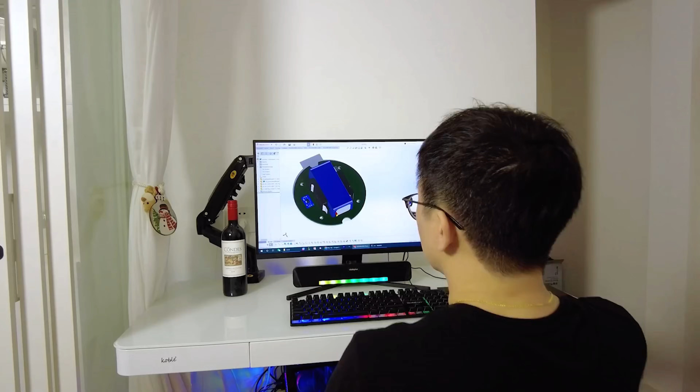You've probably heard me say this in my other videos, but I can't stress it enough. Designing parts that can be manufactured and assembled is one of the most valuable skills to possess as a mechanical engineer. It's what separates a good mechanical engineer from a great one.

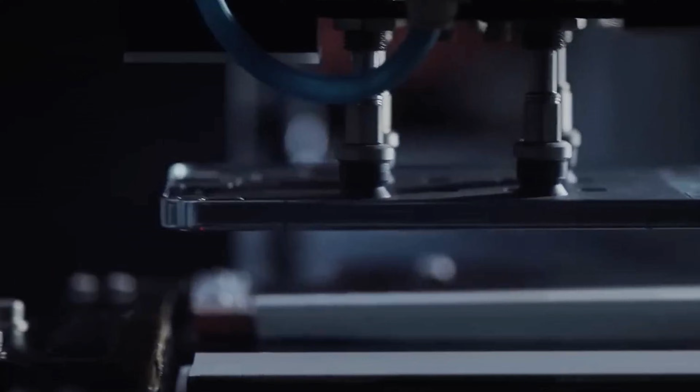Here's why. Companies are desperate for engineers who can design manufacturable parts with cost efficiency in mind. It's simple, money talks. Let me give you a real-world example. Bob, a junior engineer, designs a CNC machine part that costs $1 per unit to manufacture. No big deal, right? But what if a smartphone company needs 100 million of them a year? That's $100 million spent annually just on one part.

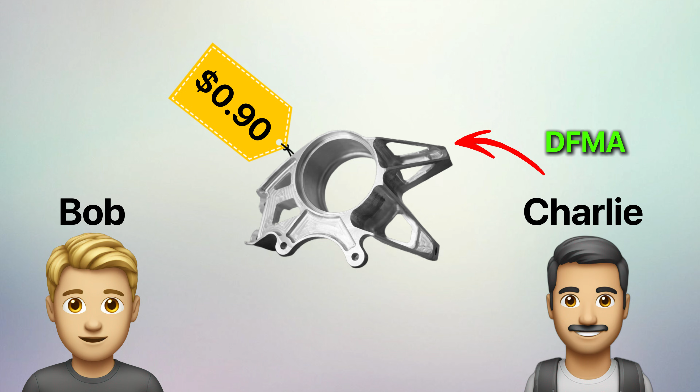Then along comes Charlie, a senior engineer. He redesigns the part with DFMA, or design for manufacturing and assembly principles, in mind, and brings the cost down to 90 cents. Charlie just saved the company $10 million on a single component. Now multiply that by the hundreds of parts in a smartphone. Imagine the massive savings across the entire operation. That's the kind of impact a mechanical engineer with solid DFMA skills can have.

But here's the kicker. Despite the importance of DFMA, many mechanical engineers I've worked with, some from even the top institutions and companies, don't get it. Why? Well, for one, there are literally hundreds of manufacturing processes, each with their own set of design guidelines and rules. It can be very overwhelming and virtually impossible to learn on your own without practical experience.

The truth is, 95% of mechanical engineers design parts on their computers without ever stepping foot into a CNC shop or seeing a plastic injection molding machine in action. With the globalization of sourcing and supply chains, you might be designing parts in San Francisco, while these parts are being made and assembled 8,000 kilometers away in Shenzhen, China. So if you've never seen the actual machines or truly understand the process steps and parameters instrumental in bringing your designs to life, how can you expect to optimize them?

So in today's video, I'm going to talk about a dozen or so manufacturing processes that every mechanical engineer should know, and a systematic way of learning how to design parts for each of these processes.

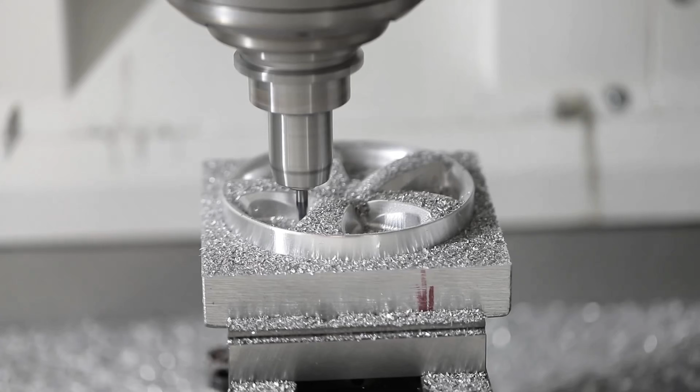The first type of foundational manufacturing process is CNC machining. It's a subtractive manufacturing process where material is removed from typically metals and plastics to arrive at the intended shape. Three key machining processes are milling, turning, and drilling.

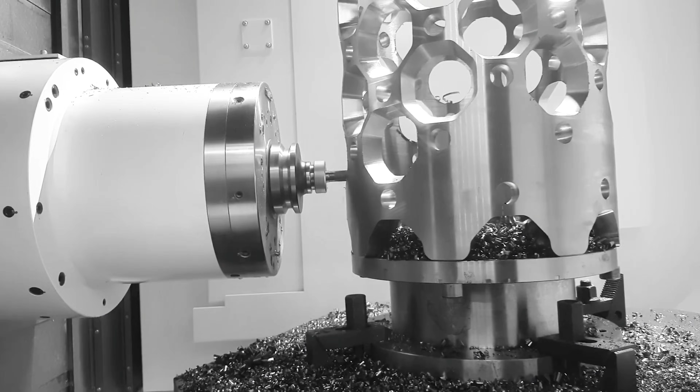Milling involves removing material from a workpiece using a rotating cutting tool called a mill or milling cutter. It can create complex shapes, contours, and holes by moving the cutter across the workpiece in different directions, and can be performed on flat, curved, or irregular surfaces.

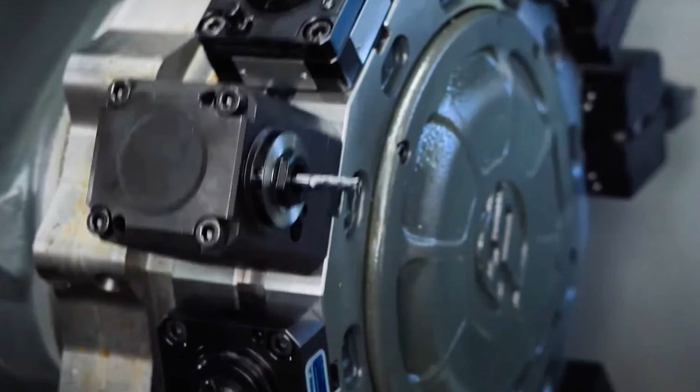Milling is done on a manual or computer numerical control, CNC, milling machine. The milling machine has a tool turret that holds a number of tools like cutters and drill bits in the correct sequence. The cutting tool rotates while the workpiece is fixed to the work table.

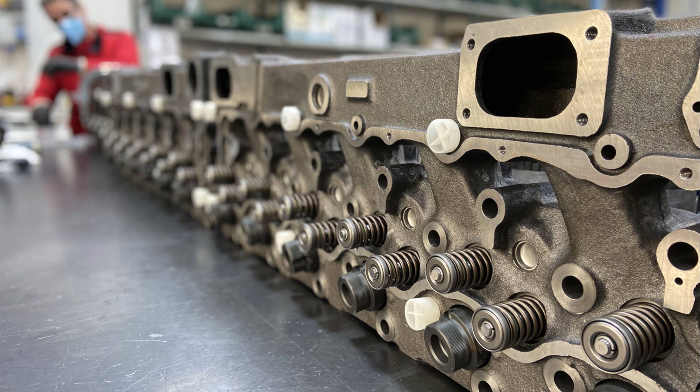Milling is used to make a variety of things, from cylinder heads and turbine blades to medical implants and smartphone enclosures. Milling machines can achieve standard tolerances anywhere between plus or minus 1/1000th to 5/1000th of an inch. With certain machines and specialized setups, tighter tolerances of 2/10,000ths of an inch are possible.

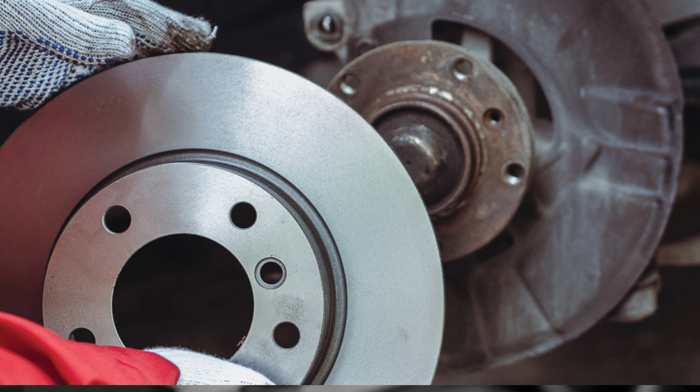Turning, on the other hand, involves rotating the workpiece while a cutting tool moves linearly along it to remove material and shape it into cylindrical parts such as crankshaft rods, brake rotors, bearings, musical instruments, and even baseball bats. A lathe is used for turning and again can be manual or CNC.

The third machining process you should know about is drilling, which is pretty self-explanatory. Drilling is used to create holes in a material using a rotating cutting tool called a drill bit. Either a drill press or a CNC mill can perform drilling. The holes you see in furniture, printed circuit boards, or laptop housings are created using drilling.

Some notable CNC machine brands you've probably heard of include Haas, Fanuc, DMG Mori, Okuma, and Amada.

Now, to really understand DFMA for CNC machining and any other manufacturing process, you first need to understand the exact process steps, key parameters, and constraints.

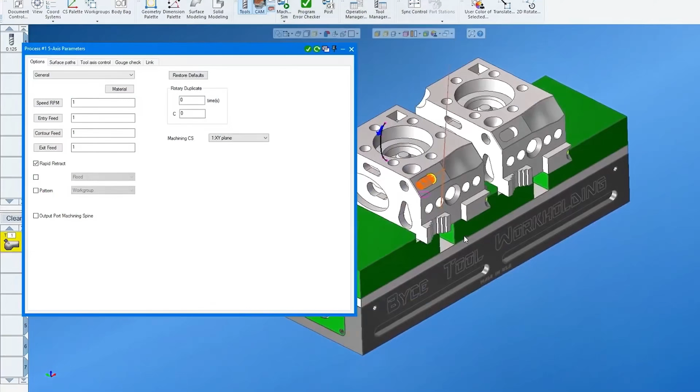So the general process steps for CNC machining is importing a CAD model provided by the mechanical engineer into computer-aided manufacture, or CAM, software, where the machining strategy is developed and tool paths, tool selection, cutting speeds, and feeds are defined.

Next, the appropriate raw material is chosen. It could be a metal like steel or aluminum, or a plastic like ABS or polyethylene. The stock is cut to the required size and mounted to the CNC machine with clamps, a vise, or a fixture. Then the appropriate tools like end mills, drill bits, reamers, taps, and T-cutters are loaded. The machine and tools are calibrated and the tool offsets are set to ensure the correct depth and cutting locations.

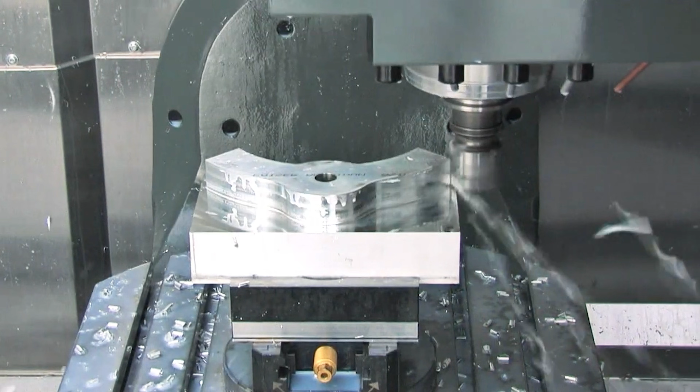Finally, we get to rough machining, where larger tools are used to remove the bulk of the material. To minimize cycle time, faster cutting speeds and higher feed rates are used here. After roughing, semi-finishing cuts are made with smaller tools to further refine the part geometry.

Lastly, the finishing pass is where precision machining happens. Fine tools and slower cutting speeds are used to machine the part to its final tolerances and surface finish. This step is crucial for achieving smooth surface finishes and accurate dimensions.

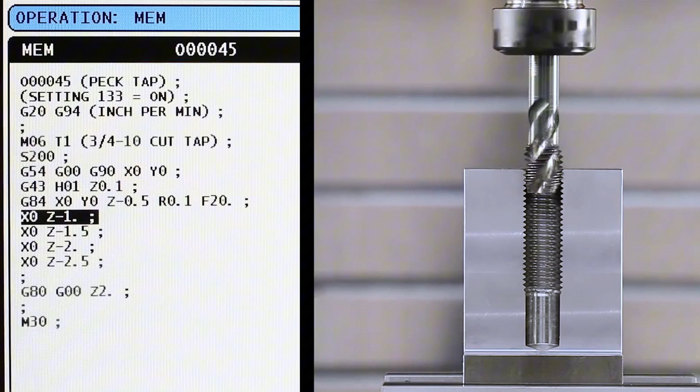If the part requires holes, the CNC machine drills or bores them at this stage. Tapping is done to create internal threads, and boring might be used to refine hole diameters to tight tolerances. Of course, the CNC machining process might look different for each part, but you now have a pretty good high-level understanding of the process.

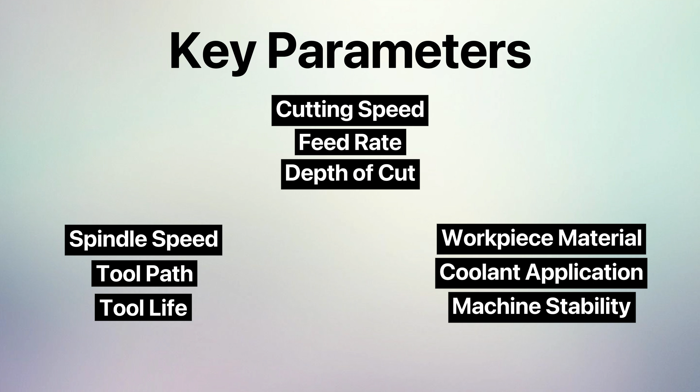Keeping these parameters in mind, now let's talk about the constraints. The first constraint is, of course, tool access and reach. CNC machines rely on rotating cutting tools which can only access certain areas of a part. That's why deep cavities, narrow features, and complex internal geometries may be difficult or impossible to machine.

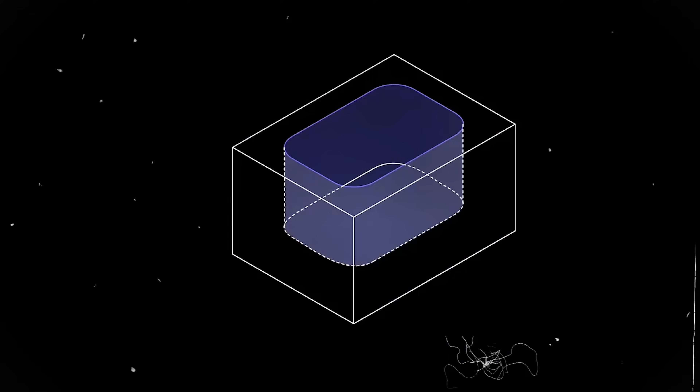Limit the depth of cavities to no more than 4 times the tool diameter to avoid tool deflection. If your part does have deep pockets, incorporate a 1 to 3 degree draft angle on all vertical walls to reduce tool wear and improve material removal. Design parts with shallow pockets or consider splitting complex parts into multiple components for assembly. Remember, every design element should serve a functional purpose. If it doesn't, eliminate it to reduce cost and complexity.

The second constraint is CNC cutting tools are cylindrical and cannot create sharp internal corners. Therefore, you should always fillet corners with a radius of at least 1/3 the cavity depth. The third constraint is thin walls vibrate, deflect, and break under machining forces, so keep wall thicknesses to at least 0.8 millimeters for metals and 1.5 millimeters for plastics to ensure stability and avoid warping.

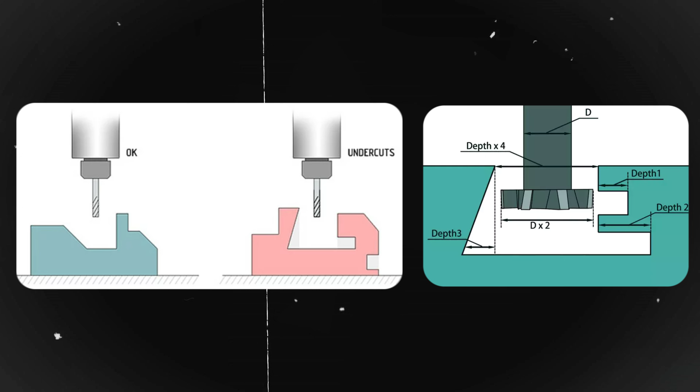The fourth constraint is standard CNC tools cannot create undercuts, which are hidden geometries not visible from above the part. Avoid undercuts if possible, but if they're absolutely necessary, design them with standardized clearance cuts so that off-the-shelf tools like T-slot cutters and dovetail tools can be used.

The fifth constraint is non-standard hole sizes require custom tools or extra machining time, so stick to standard drill sizes and thread sizes. The sixth constraint is tighter tolerances increase machining time and cost.

Apply tight tolerances only to critical features. For non-critical dimensions, use standard tolerances of ±0.005 of an inch or 0.125 millimeters or more. This reduces cost and speeds up production.

The seventh constraint is small features and intricate designs are difficult to machine and require tiny tools that are prone to breaking, so avoid features smaller than 2 millimeters in size.

The eighth and last constraint we'll discuss is complex geometries make it difficult to securely clamp the workpiece. Ensure there are flat surfaces or bosses for clamping. Complex parts might need to be divided into multiple setups or require custom fixtures.

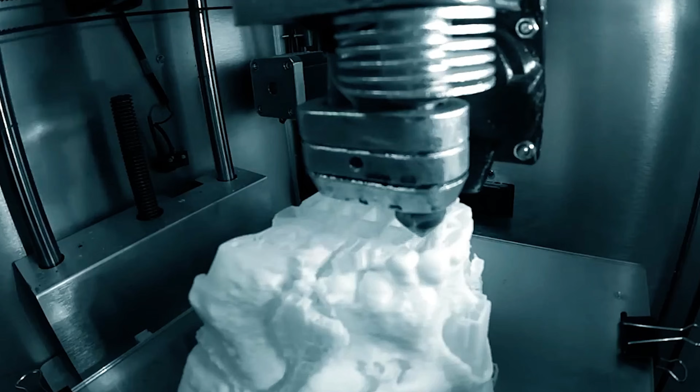The second manufacturing process that every mechanical engineer should know is additive manufacturing or 3D printing. Unlike CNC machining, which is subtractive, 3D printing is an additive process where material is built up layer by layer to create a part. 3D printing offers many benefits and can create complex geometries that would be impossible or costly to produce with traditional manufacturing methods. It's a game changer for prototyping, testing, and even making production parts.

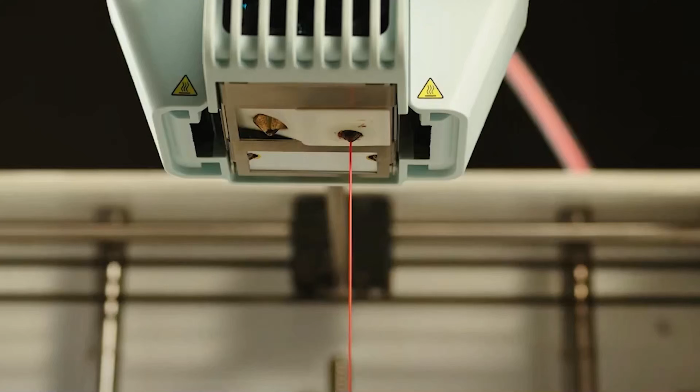Now, there are many different types of 3D printing, and I won't go into detail for every one in this video, but fused deposition modeling or FDM is the most common and affordable method. FDM printers extrude thermoplastic filament through a heated nozzle layer by layer and are widely used for prototypes, functional parts, and hobbyist projects. Some notable brands include Prusa, Raise 3D, Bambu, MakerBot, Creality, and Ultimaker.

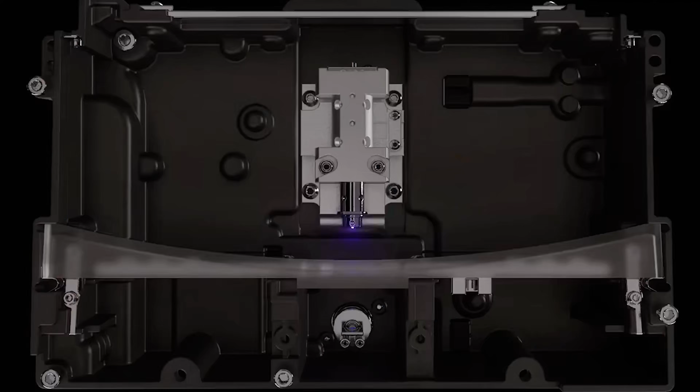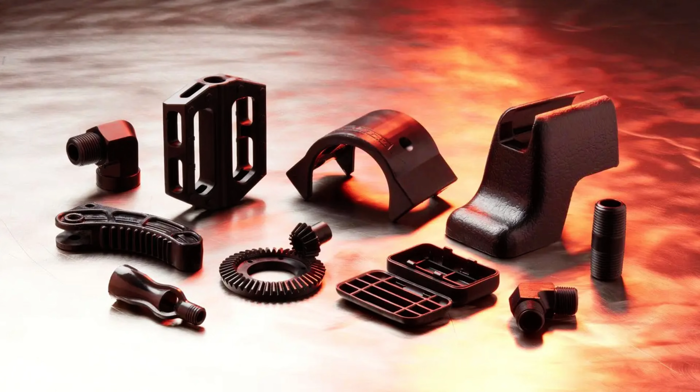Another popular one is stereolithography or SLA, which was the world's first 3D printing technology. This method is more complex than FDM and uses a light source to cure liquid resin layer by layer. SLA produces high resolution, tighter tolerances, and smooth surface parts, and is often used for intricate prototypes and end-use parts, but at the same time, it's also more expensive and has a higher cycle time. Notable brands include Formlabs, Prusa, 3D Systems, Anycubic, and Peopoly.

Selective laser sintering, or SLS, is the third type that utilizes a laser to fuse powder material together layer by layer. It's popular for producing functional and durable prototypes and end-use parts for industries like automotive and aerospace. Printer brands include 3D Systems, EOS, Formlabs, Sinterit, and HP.

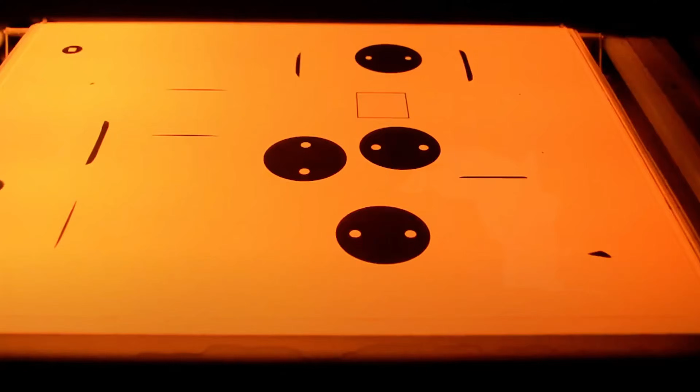Next is multi-jet fusion, or MJF. MJF printers jet a fusing agent on a bed of powdered material followed by heat to fuse the powder. It offers high-quality surface finishes and is used for prototypes and production parts. Notable brands include HP, VoxelJet, E+3D, and Farsoon Technologies.

These four methods are primarily used for printing plastics. SLS might be used for printing metals as well. Direct metal laser sintering and selective laser melting are two methods for printing metal parts. Binder jetting is a less common method for printing metal and ceramic parts.

In terms of precision, SLA ranks at the top and can achieve a tolerance of ±0.004 of an inch or 0.1 millimeters, followed by MJF and SLS, with FDM being the least precise at around ±0.020 of an inch or 0.5 millimeter. However, FDM is the most cost effective in terms of making prototypes and large parts. So you ultimately have to pick and choose which method to use based on your design needs.

Common 3D printing plastics include ABS, PLA, polycarbonate, nylon, and TPU. Metals include aluminum, stainless steel, titanium, and Inconel.

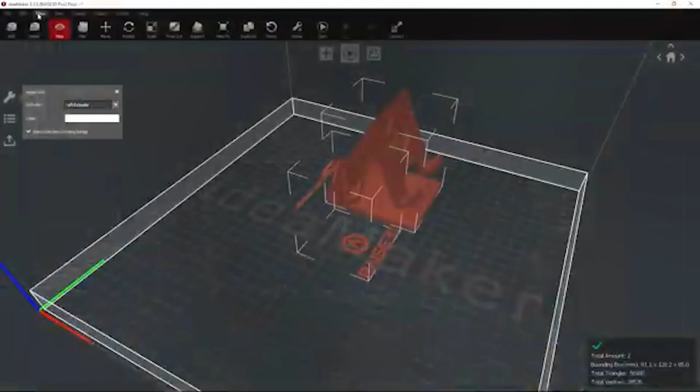The general process steps for 3D printing are first slicing the CAD model into thin layers and saving it as an STL file. Each layer is a 2D representation of the part. Next, the raw material, whether plastic filament, metal powder, or resin, is loaded into the printer. The printer then does its thing, and the total print time will vary based on printer settings and type, part size, and infill density. Lastly, any support structures and rafts are removed, and the part can be sanded and polished if necessary.

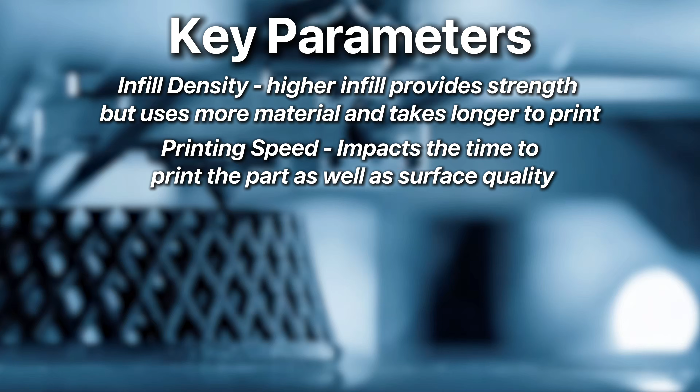Now, there are several parameters to keep in mind when designing 3D printed parts. Higher infill provides strength but uses more material and takes longer to print. Printing speed affects the time it takes to print the part and can impact surface quality. Slower speeds often result in better quality but takes more time. The nozzle temperature and print bed must be carefully controlled for good material flow and adhesion between layers.

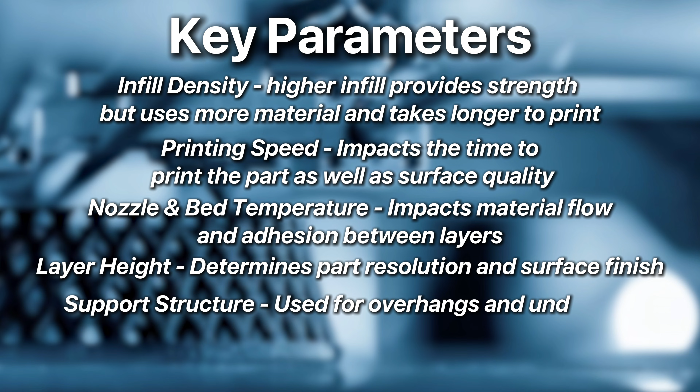Layer height determines the resolution and surface finish of the part. Smaller layer heights give finer detail but increase printing time. Then there's support structures for overhangs, undercuts, and complex geometries. Supports are often needed to prevent sagging or distortion during printing.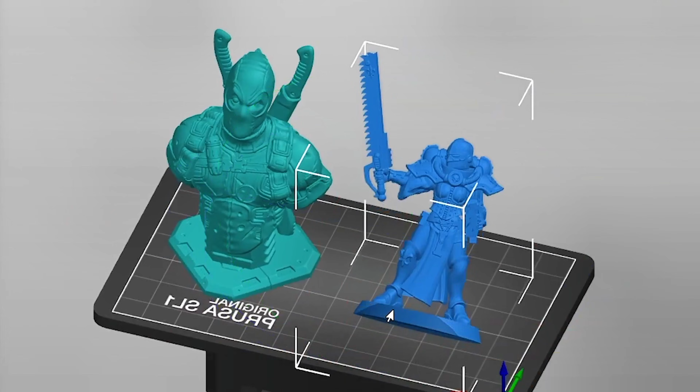As for the constraints to consider, the orientation of the part during printing is very important and affects the surface finish, strength, and print time. Try to orient the part so that critical surfaces are printed in the XY plane, where most 3D printers offer the highest precision. Maybe you don't care about precision and just want to minimize print time. In that case, play around with different orientations, print speed, and infill density.

Next is material shrinkage. Certain materials, especially metals and some plastics, shrink slightly as they cool and solidify, so keep this in mind when designing.

The third constraint is complex internal structures. While 3D printing allows for the creation of internal channels and voids, they can be very challenging to clean and inspect, so ensure they're accessible or include escape holes for removing any trapped powder, uncured resin, or support material.

The fourth constraint is thin walls, which are prone to warping. Keep wall thicknesses above 0.8 millimeters for plastics and 1 millimeter for metals to ensure part stability and printability.

The last constraint is surface finish. The surface finish of 3D printed parts is often rough, particularly in FDM printing, where visible layer lines are present. Plan for post-processing like sanding, polishing, or coating if surface finish is critical, or opt for technologies like SLA or SLS for smoother surfaces.

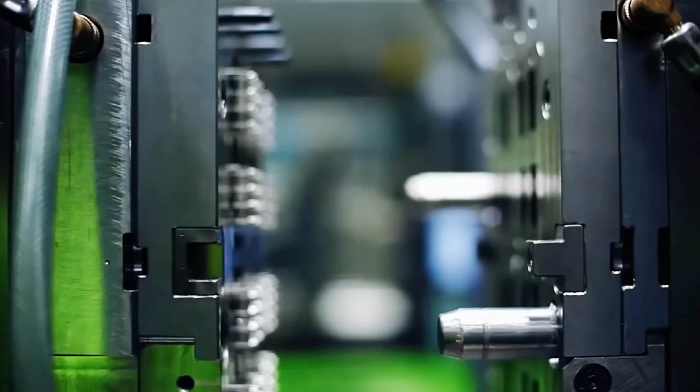Next up is injection molding, which is a formative manufacturing process where material is forced into taking on a certain shape. No material is removed. It's the go-to method for the mass production of parts made out of plastic materials like ABS, polypropylene, polycarbonate, nylon, and polyethylene.

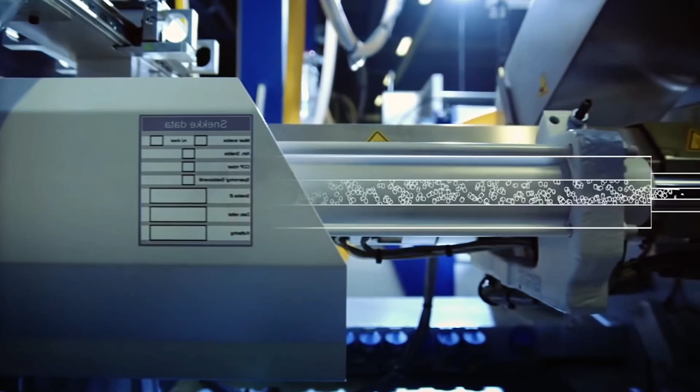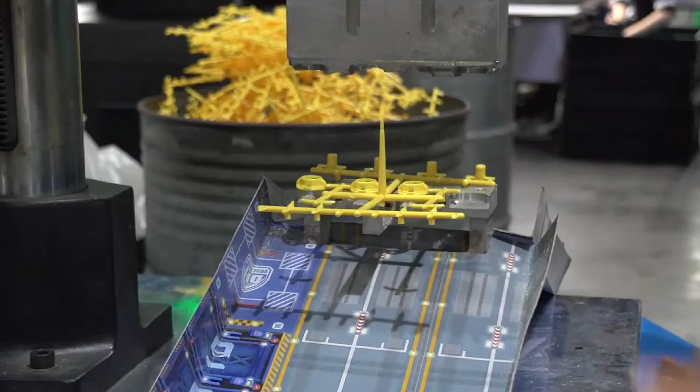Injection molding works by injecting molten material into a mold cavity where it cools and solidifies into the final part shape. Injection molding is used to produce high volume, complex, and detailed parts, including Legos, smartphone enclosures, dashboard panels, and syringes, but can also be used for prototyping.

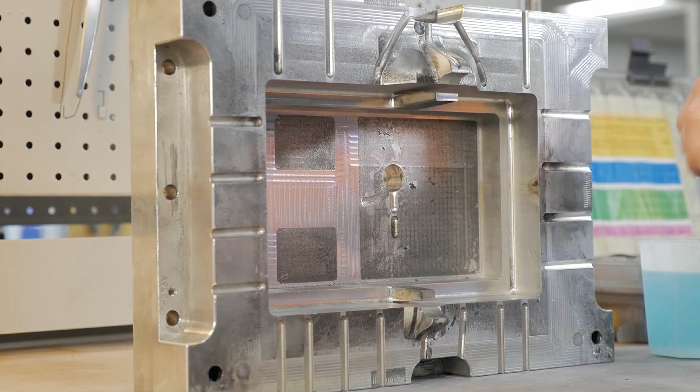Its process steps include firstly clamping the two halves of the mold together. The mold is commonly fabricated out of hardened steel or aluminum. The half of the mold that shapes the internal features of the part and contains the ejector system that pushes the part out is called the core. The other half of the mold is called the cavity, which forms the exterior or cosmetic surfaces of the part.

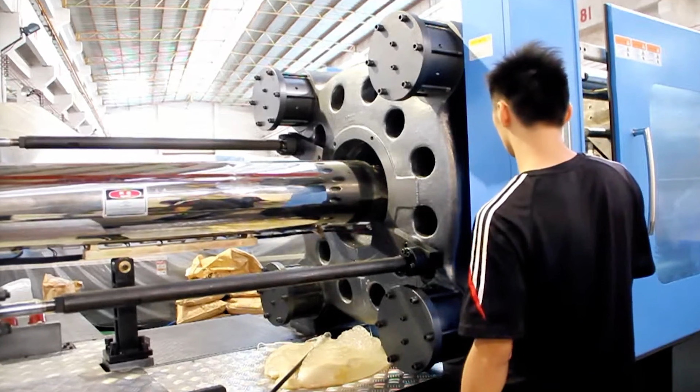The second step is injection of the molten plastic material into the mold cavity at high pressure using a screw or ram injector. Next, cooling and solidification of the material into the shape of the cavity occurs. Then the fourth step is ejection of the cooled part where the mold opens and the ejector pins push the part out. Some parts might require post-processing like trimming flash, polishing, or painting.

Now let's move into the critical parameters of injection molding. First is injection pressure, which controls the flow of the molten material into the mold. Higher pressures allow for more intricate details but can cause flashing or deformation.

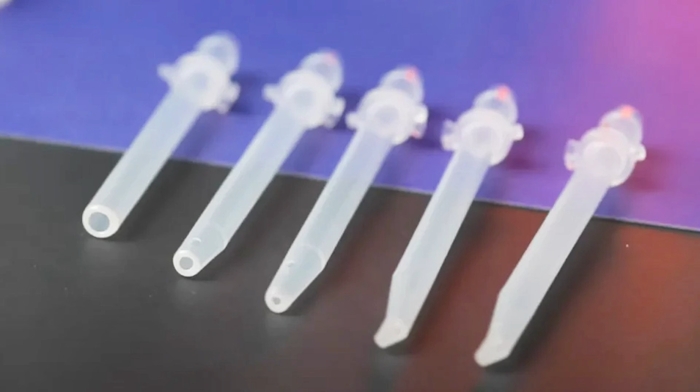Second is temperature. The material must be heated to the correct melting point. Too low of a temperature leads to incomplete fills called short shots, while too high of a temperature can degrade the material. Third is cycle time, the time it takes for clamping, injection, cooling, and ejection.

Fourth is clamping force, which ensures the mold stays closed during injection. Higher forces are needed for larger parts and those with complex geometries. Inadequate clamping force can result in flashes and poor geometrical precision.

Finally, cooling time affects the final quality of the part. Insufficient cooling can result in warping or shrinkage.

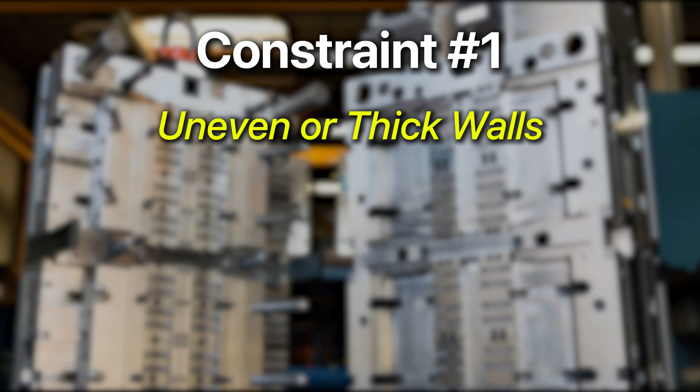Now, in terms of constraints, here's how you can apply DFMA principles to address them. The first constraint is uneven or thick walls can cause warping, sink marks, and voids. Keep wall thicknesses uniform to ensure even cooling. Aim for 1 to 4 millimeter thickness for most plastics.

The second constraint is parts without draft angles will stick to the mold, so apply a draft angle of at least 1 to 2 degrees on all vertical walls to facilitate ejection.

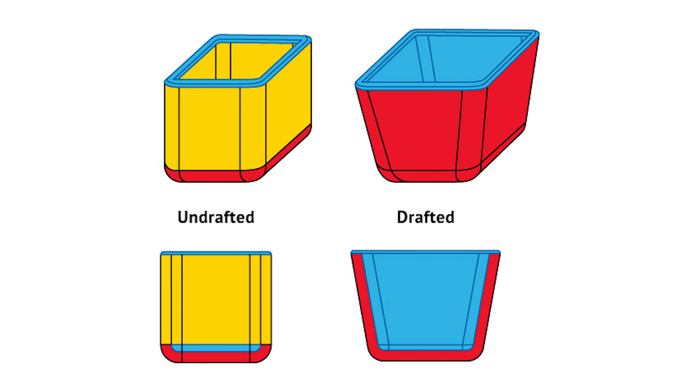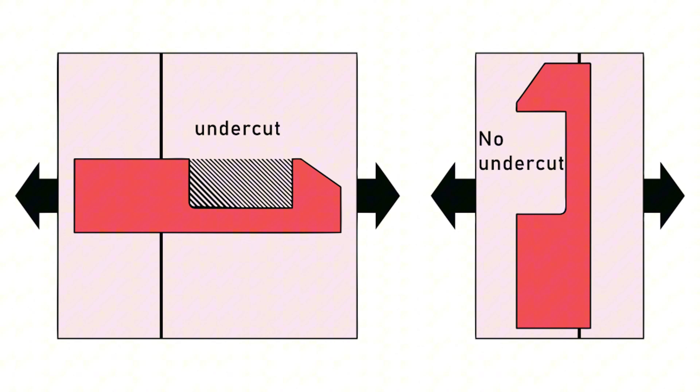The third constraint is features that prevent the part from being ejected straight out of the mold create undercuts, making ejection difficult. Avoid undercuts when possible, but if it's necessary, choose the parting line wisely, which is just the line where the two halves of the mold meet. You'll also want to modify your designs to incorporate side actions, bump offs, and lifters to handle undercuts.

The third constraint is plastic shrinks as it cools, leading to dimensional inaccuracies.

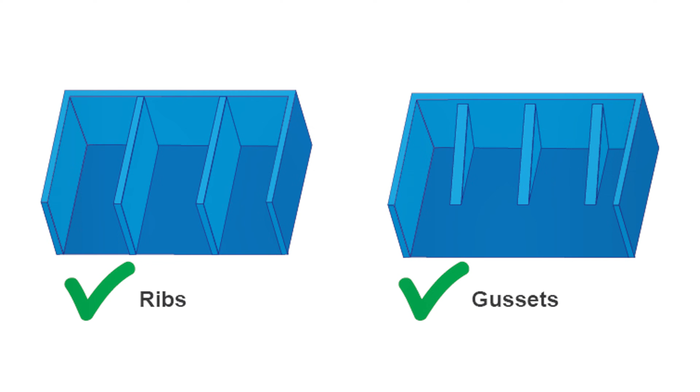Account for material-specific shrinkage rates, typically between 0.5 to 2%, and add ribs or gussets to strengthen thin walls while minimizing material usage. The fourth constraint is sharp corners create stress concentration points and can lead to cracking. Incorporate fillets with a minimum radius of 0.5 millimeter to reduce stress and allow for easier flow of material.

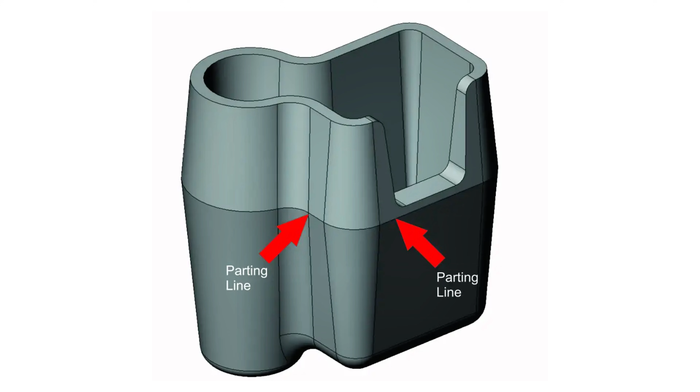The fifth constraint is visible seams, aka parting lines, are left where the mold halves meet, so design parts with clear parting lines, ideally in non-visible areas of the part to hide any imperfections from the seams.

The next constraint is thin-walled bosses can crack or sink during molding, so use rounded bosses with sufficient wall thicknesses and avoid creating thin-walled areas around holes.

Last but not least, complex flow paths can lead to short shots or weld lines where molten material meets. Ensure proper locations of gates, which is where material enters the mold, and avoid non-uniform wall thickness.

If your design has holes, it's very likely that weld lines are unavoidable, so if cosmetics matter a lot, consider machining part features like holes into the part after injection molding has completed.

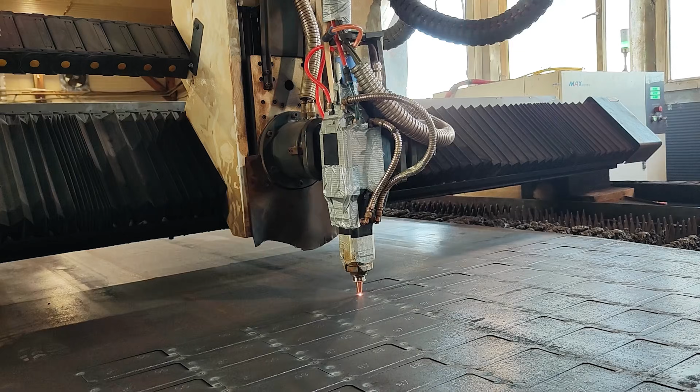That brings us to the third essential manufacturing process, and it's another formative process like injection molding: sheet metal forming. Sheet metal forming can also involve subtractive processes like laser cutting or punching, where material is removed to create holes or cutouts. However, sheet metal forming is more about forming rather than removing material like CNC machining.

Sheet metal forming involves bending, stretching, or otherwise shaping metal sheets into the desired form. There are tons of sheet metal forming processes, so try and learn as many as you can. A good one to know is bending, which is pretty straightforward.

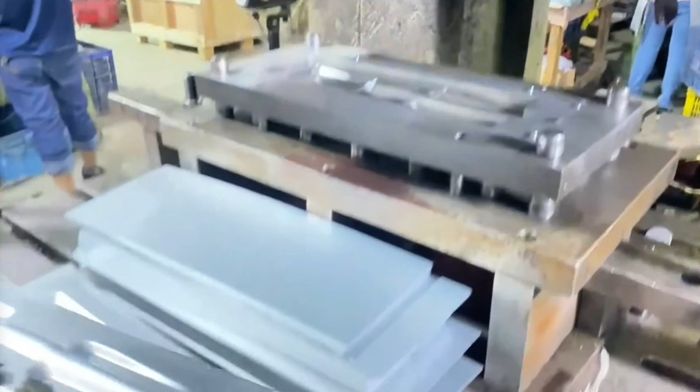The metal sheet deforms by applying force to it at an angle on a press brake or hydraulic press with a punch and a die. Next, stamping uses a stamping press that presses a sheet into a die to form a part, and actually encompasses a handful of forming processes like punching, blanking, coining, and embossing.

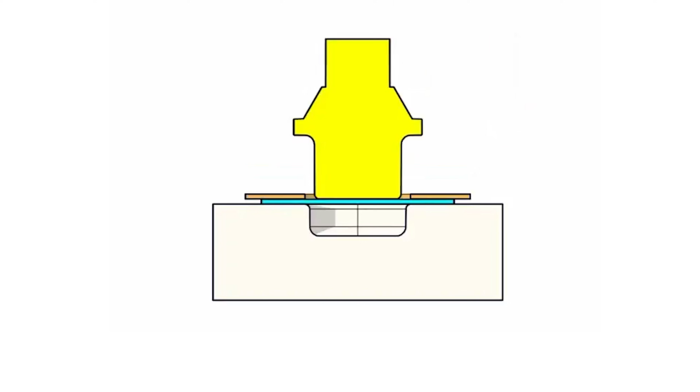Then there's deep drawing, where the sheet is drawn into a die to form a deep hollow shape such as a cup or a can. Think kitchen sinks, soda cans, and gas tanks.

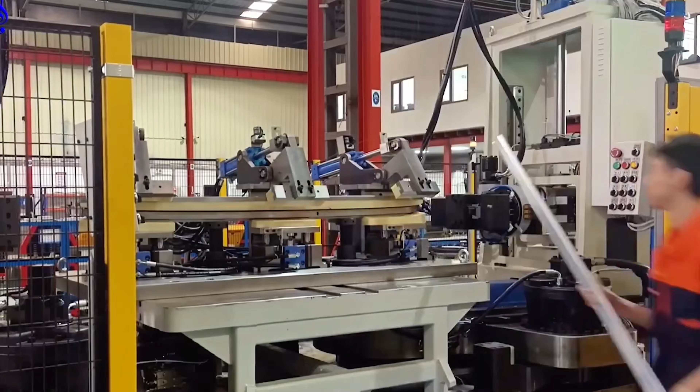Next is stretch forming, which is similar to bending but is commonly used to make components that require a larger bend radius, like aircraft fuselage and wing components and car door panels.

Spinning is used to make axis-symmetric parts by rotating a flat metal disc or tube against a forming tool on a spinning lathe. Think vases, rocket noses, and scuba tanks.

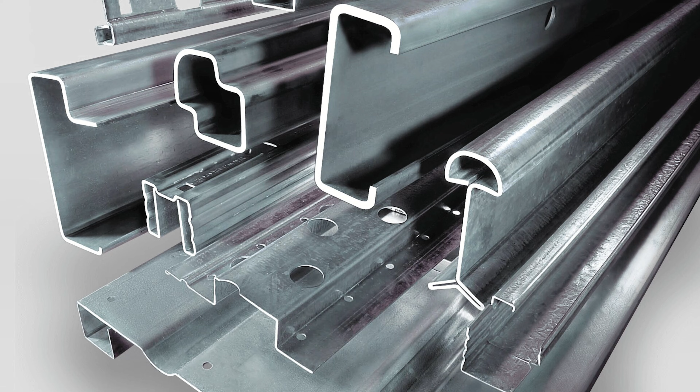Roll forming, on the other hand, is leveraged to make long products like gutters, as well as tubes and pipes in automotive exhaust and HVAC systems, metal roofing panels, and metal housings in refrigerators and ovens. Common sheet metal materials include steel, aluminum, copper, and titanium.

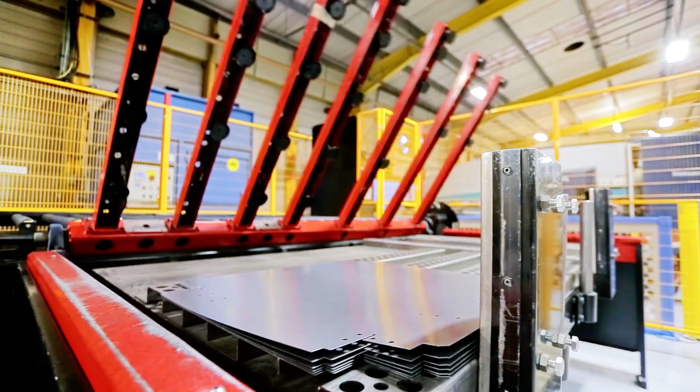Now, the process steps for sheet metal forming will vary based on part complexity, but generally the sheet metal is placed onto a die which shapes it through processes like bending, stretching, or stamping.

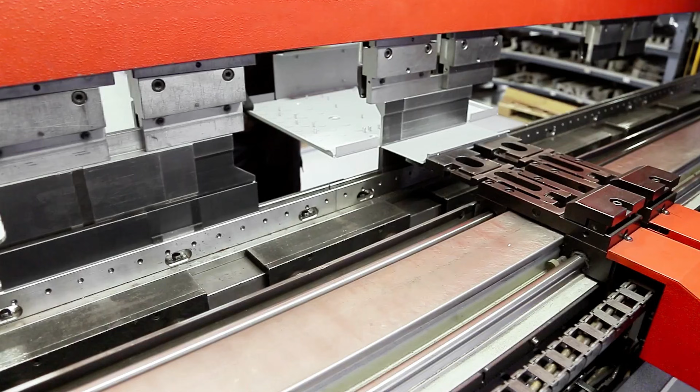Tools like punches or press brakes are used. The metal is pressed or stretched to its final shape using equipment like hydraulic presses or mechanical stamping machines. After forming, excess material is trimmed and holes may be punched or laser cut to precise locations.

Additional secondary operations like hemming, embossing, or welding might be performed, and surface finishing processes like painting, anodizing, or powder coating might be applied to improve cosmetics and enhance material properties.

The key parameters that you should think about when designing sheet metal parts are bend radius, material thickness, tooling clearance, and forming speed and pressure.

The constraints include bend radius, which is the minimum radius the sheet can be bent without cracking. Typically, it should be no less than the sheet's thickness.

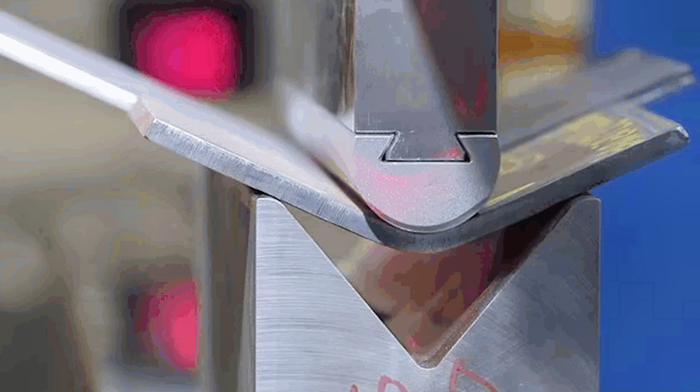Then there's spring back. All sheet metal will spring back slightly after bending due to elastic and plastic deformation. To counter this, overbend parts slightly or adjust tooling.

Spring back depends on many variables but can be predicted with reasonable accuracy using K-factors, spring back factors, elastic modulus, and yield strength. Based on my experience, mechanical engineers can design sheet metal parts with appropriate compensation for spring back. The manufacturer's expertise will then fine-tune the process to meet your specifications.

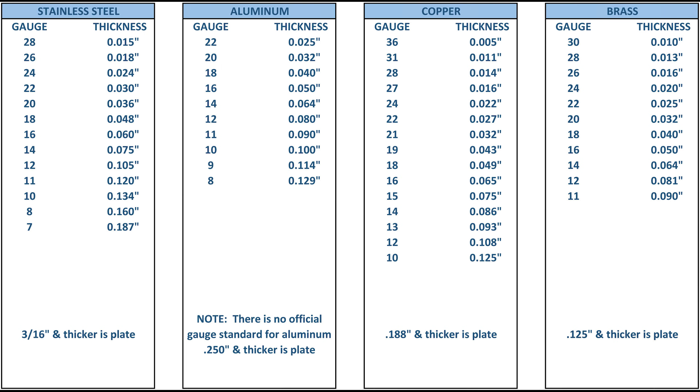Next is material thickness. Thicker sheets are stronger but harder to form, and thinner sheets can be shaped more easily but lack strength. You should also avoid drastic changes in material thickness that can lead to stress concentrations and defects such as cambering. The fourth constraint is hole placement.

Sheet metal is prone to tearing or distorting when there are holes, so keep them at least 2 to 3 times the material thickness away from the edge of the sheet.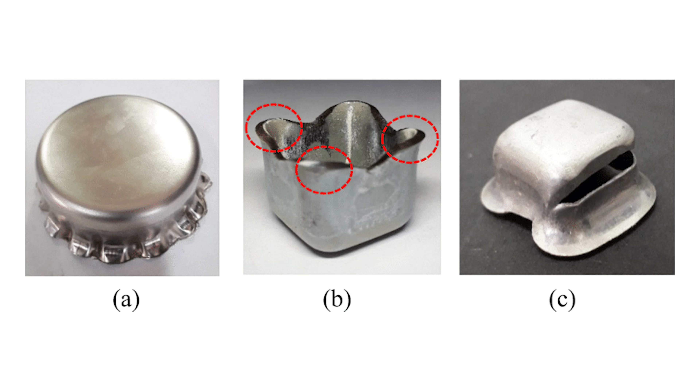The next constraint applies to deep drawing. Limit the draw ratio, which is the height to diameter ratio, to less than 2 to 1 to avoid tearing or wrinkling, and use gradual transitions for complex geometries.

Constraint number 6 is flanges and tabs are prone to buckling, so the length of them should be at least 2 times the sheet thickness.

Another formative manufacturing process very similar to injection molding is casting, where liquid material is poured into a mold and allowed to solidify, forming the desired shape. Casting is especially suitable for producing high volume parts with complex geometries that would be difficult to machine.

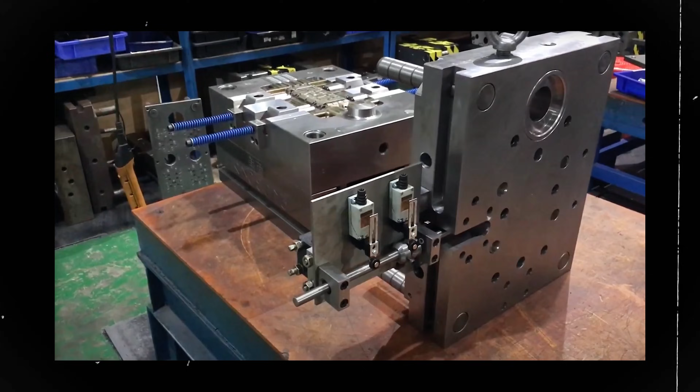There are many different types of casting, and I like to categorize them based on mold type: either an expendable mold that is destroyed or altered during removal of the cast part, for low to medium production volumes, or a permanent mold that is reused multiple times, generally used for higher production volumes and parts that can be easily removed from the mold.

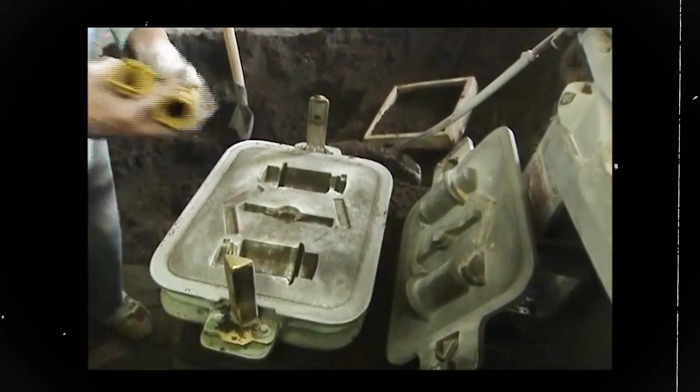Expendable mold casting includes sand casting, where a pattern is placed in a sand mold, the sand is compacted around it, and the pattern is then removed, leaving a cavity for the molten metal. The sand mold is destroyed or broken to remove the casting. Sand casting is used to make things like engine blocks, cylinder heads, and pump housings.

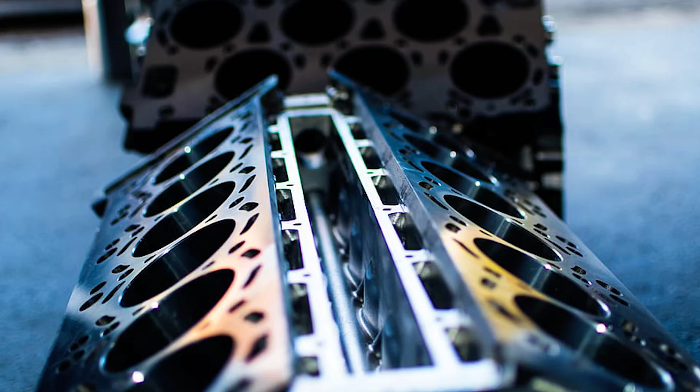Another is investment or lost wax casting, where a wax pattern is coated with a ceramic shell, which is then heated to remove the wax and harden the shell. The shell is destroyed to remove the finished part. This method is used for intricate and high precision parts.

Permanent mold casting includes die casting, where molten metal is injected under high pressure into a reusable steel mold. The mold is designed to be used repeatedly, and the castings are removed after solidification.

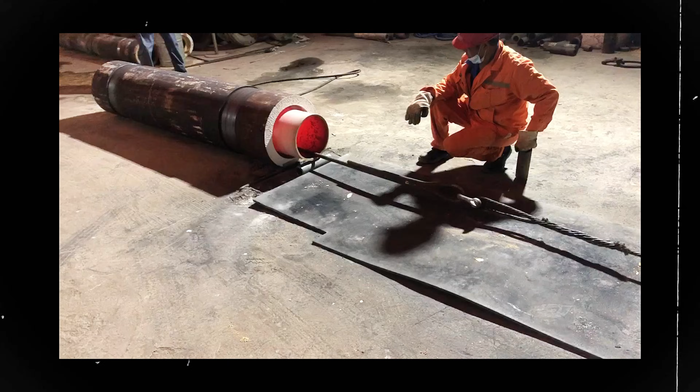Another is centrifugal casting, where molten metal is poured into a rotating permanent mold. The centrifugal force helps distribute the metal to create a high quality casting. This process is used to make axisymmetric parts like pipes, flywheels, cylinder liners, and jet engine compressor cases.

Casting materials include steel, aluminum, bronze, brass, and ceramics.

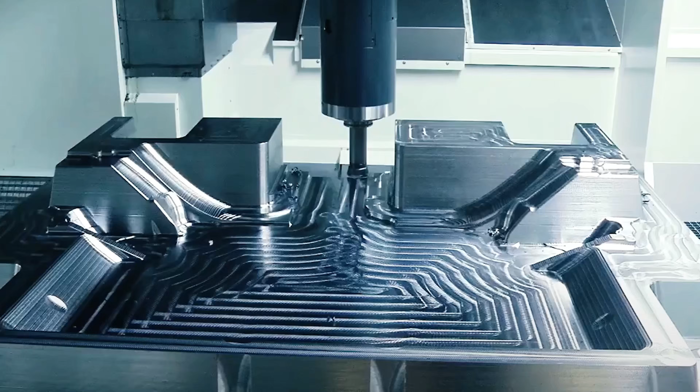The process steps of casting begin with creating a pattern and then making the mold with the pattern. The molten material is poured into the mold cavity through the sprue and runner system, and then it cools and solidifies within the mold. After the casting has solidified, the mold is either broken or opened to remove the part.

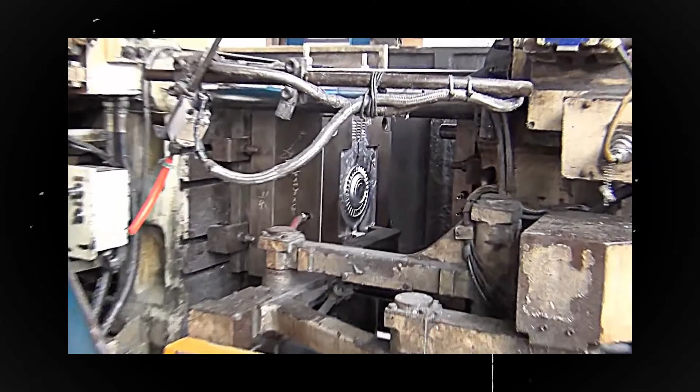The key parameters of casting are pouring temperature, cooling rate, mold material, cycle time, and material flow.

One constraint to be aware of is, of course, shrinkage. Design parts to be slightly larger to compensate for shrinkage.

Another is wall thickness. Larger variations in wall thickness can cause uneven cooling and lead to defects like warping or cracks, so keep walls as uniform as possible.

Third is draft angles. Adding a slight taper to the part's vertical walls, typically between 1 to 3 degrees, helps with mold release. Fourth is sharp corners.

Sharp internal corners are stress concentrators and can cause cracking during cooling. Always round off corners or fillet them to a reasonable radius. Fifth is section thickness.

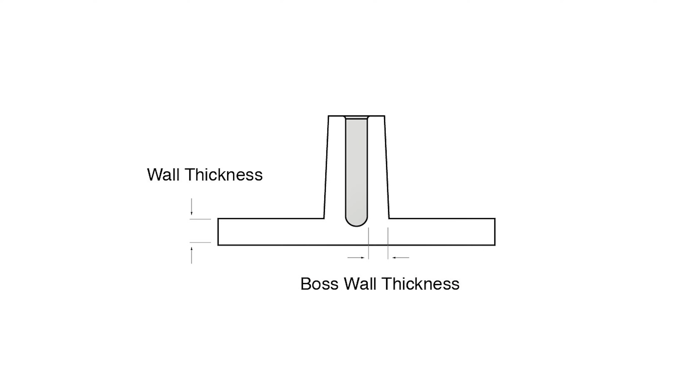Thin sections are prone to defects like incomplete filling or rapid cooling, so avoid walls thinner than 3 millimeters for metals. Thicker sections will require risers to feed material during shrinkage.

Sixth is undercuts. Similar to CNC machining and injection molding, casting can struggle with undercuts, as these can trap the part in the mold. Minimize or eliminate undercuts, or design the mold to include cores to manage complex internal geometries.

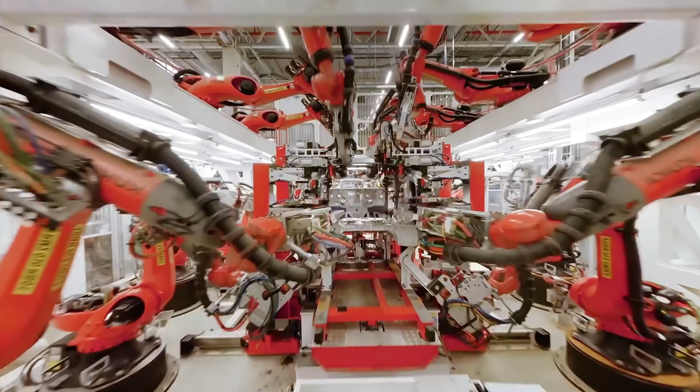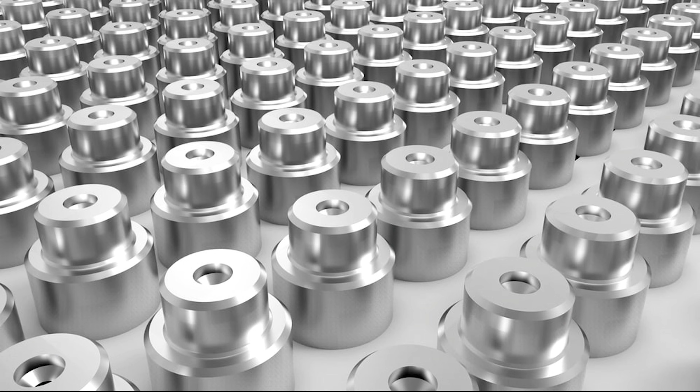So to summarize, we covered 3 essential categories of manufacturing processes: subtractive, additive, and formative, along with several key processes within each. But the world of manufacturing is vast and includes a lot more, such as joining processes like welding, brazing, soldering, adhesive bonding, and riveting, as well as surface finishing techniques like anodizing, PVD, CVD, polishing, and electroplating that I'll likely cover in a future video.

For mechanical engineers, knowing about these processes is a good start, but it's not nearly enough. It's critical to tie DFMA principles to the process steps, parameters, and constraints of each manufacturing process to elevate your designs and engineering expertise. This will make you an irreplaceable mechanical engineer who can impact a company or the world through practical design. Alright guys, that's it for today.